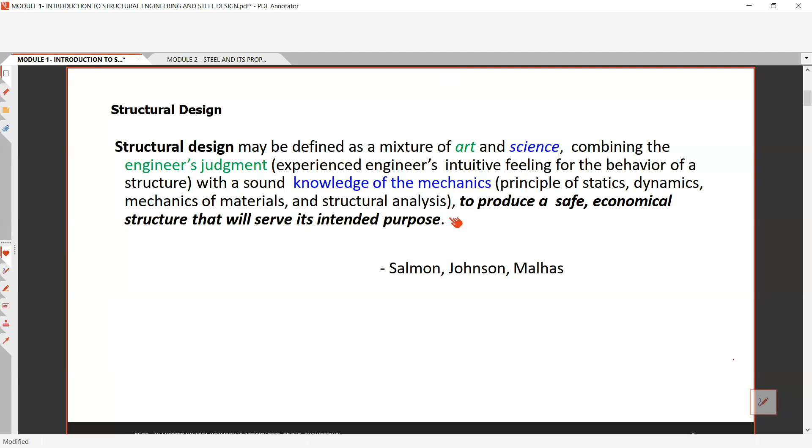So structural design may be defined as a mixture of art and science, combining the engineering judgment, experienced engineers' intuitive feeling for the behavior of structures, with the sound knowledge of mechanics. So ginagamitan siya ng principles of statics, dynamics, mechanics of materials, structural analysis, and many more to produce a safe, economical structure that will serve its intended purpose. Okay, so that is the purpose of structural design.

Okay, so what is structural analysis naman? So marami kasing nagtatanong what is design and analysis. Structural analysis is the process of determining the response of a structure due to external actions. So after you've done your structural analysis, you will do structural design in order to create a solution that is safe, economical, and stands its purpose. Okay? So yan yung structural analysis and structural design.

So for structural analysis, we need to find the actions and the response. So first, syempre, kailangan hanapin natin yung action. Actions are the anticipated forces or loads during the lifetime of the structure. Hanapin natin yung gravity loads, earthquake loads, wind loads, that is the actions. Ito yung mga anticipated forces or loads na pwede nating makonsider during the lifetime of the structure.

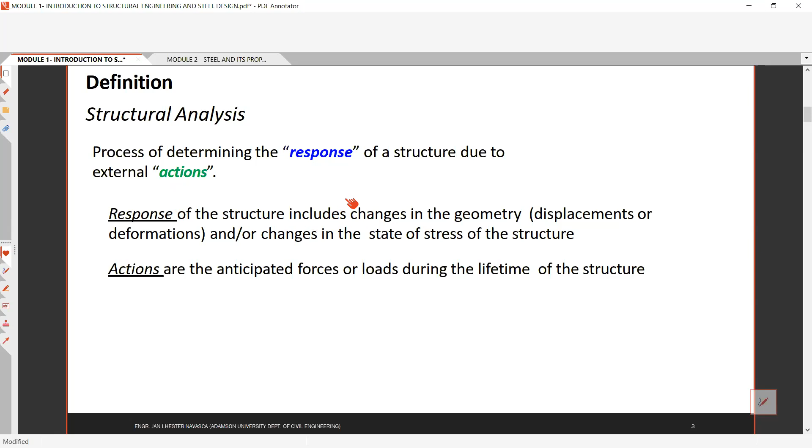Okay? So the principles of design. There are many principles of design. The design criteria are established to evaluate whether or not our design is optimum and has been achieved. The typical criteria are as follows: minimum cost, minimum weight, minimum construction time, minimum labor, minimum cost of manufacture of owner's product, and maximum efficiency of operation to owner.

Okay, so the minimum cost and the minimum weight is based na rin dun sa economical ba yung section mo. So we will check if yung section na design natin is economical, and ito na ba yung pinaka-optimum design, or ito na ba yung pinaka-magaan na section na pasok pa rin sa capacity and safety of the structure. The cost and the weight are directly related. Syempre mas mabigat, mas mahal.

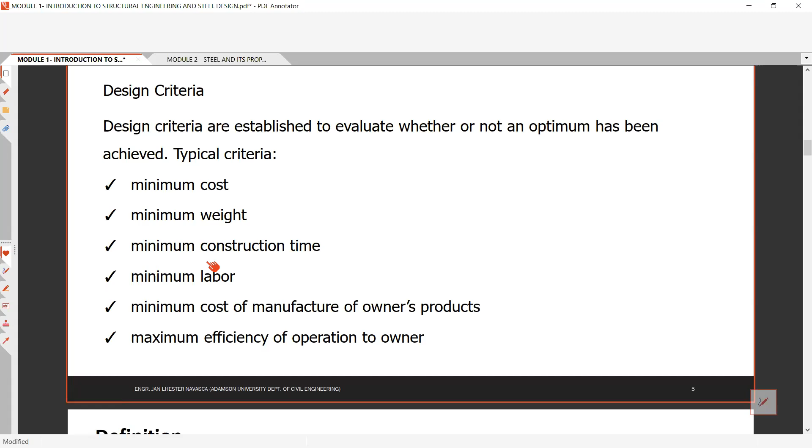Okay, next is the minimum labor. So directly related lang din tong construction time and labor. Okay, cost of manufacture of owner's product is the same, and the efficiency of the operations to owners.

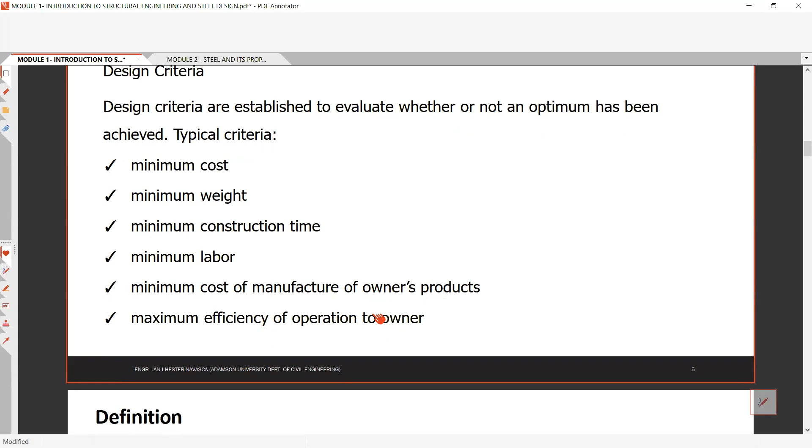Syempre, ang gusto kasi ng kalimitan lahat ng owner ay gusto matapos agad-agad yung project. So syempre, you need to catch up yung kagustuhan ng owner na yan. So that is the design criteria, or a simple design criteria in the principles of the design.

Okay, so what are the design procedure? It is composed of two parts. The first part we have the functional design, and the second part is the structural framework design. So ano yung functional design? The functional design ensures that intended results are achieved, such as the adequate working areas and clearance. Okay? So we need to consider syempre yung mga

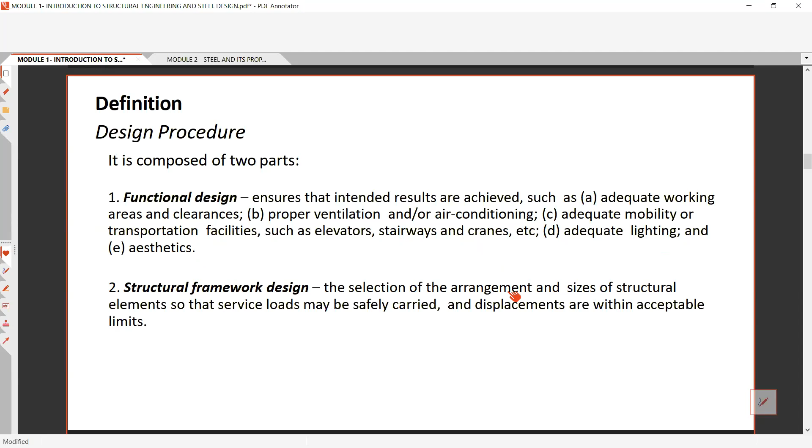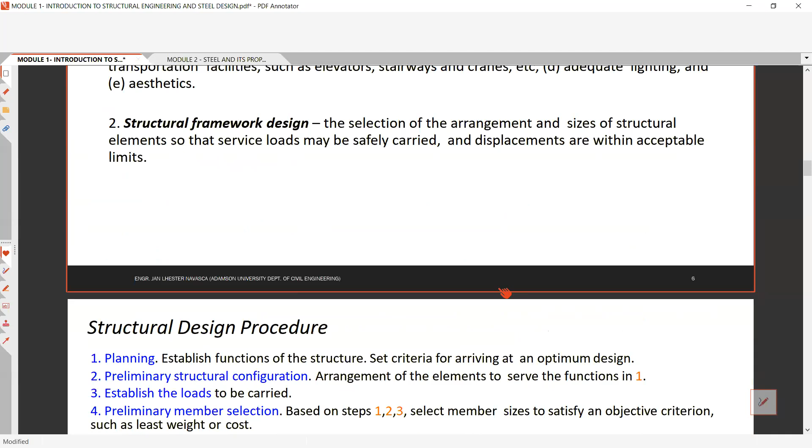So next one is the structural framework design. At this part, yung selection and arrangement of sizes of structural elements so that the service loads may be safely carried and displacements are within the acceptable limits. Okay, so ito yung ating design procedure. So we have structural design procedure. Under the structural framework design, meron pa tayong iba't ibang procedure na kino-consider. So ito yung mga typical setup.

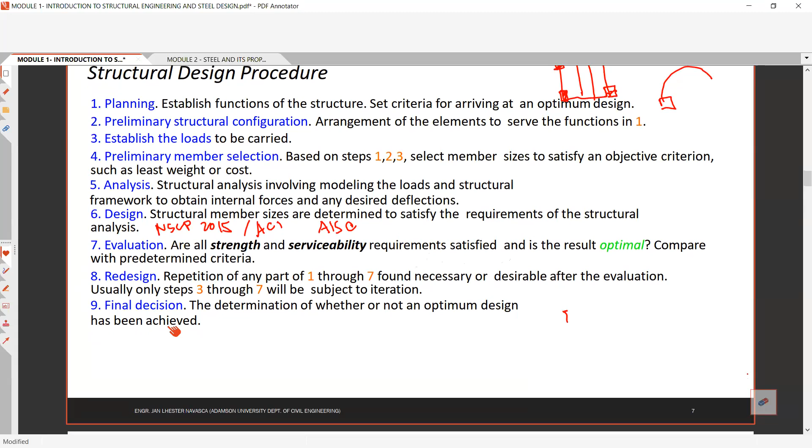Or kunwari yung top floor, may lalagyan ng helicopter pad, may pwedeng mag-landing na helicopter. So you need to reestablish the loadings and gravity loads at that area. Maybe kakapalan mo yung thickness ng slab, magbabago na naman yung stiffness matrix or the mass matrix of the whole structure. So magre-redesign ka ulit. And lastly, hopefully matapos na yung design mo within a specific time, is the final decision: determination of whether or not your design has been achieved.

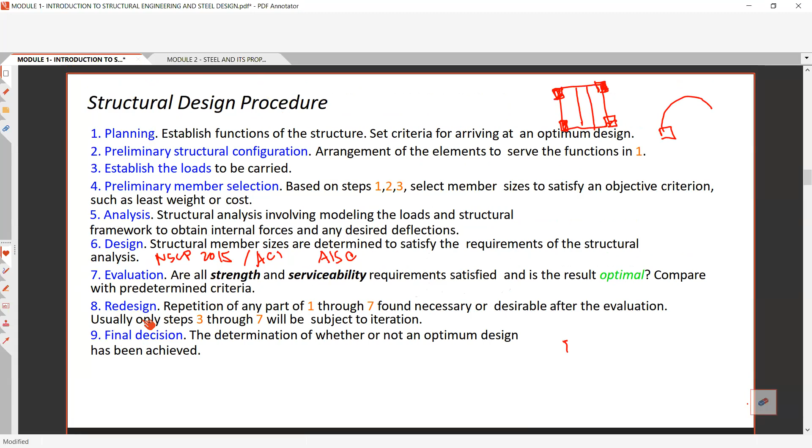Please note that all of this structural design procedure is very tedious. After ng final decision mo, let's say pasok na, ito na yung design mo, magkakaroon ka pa ng construction drawings and detailing.

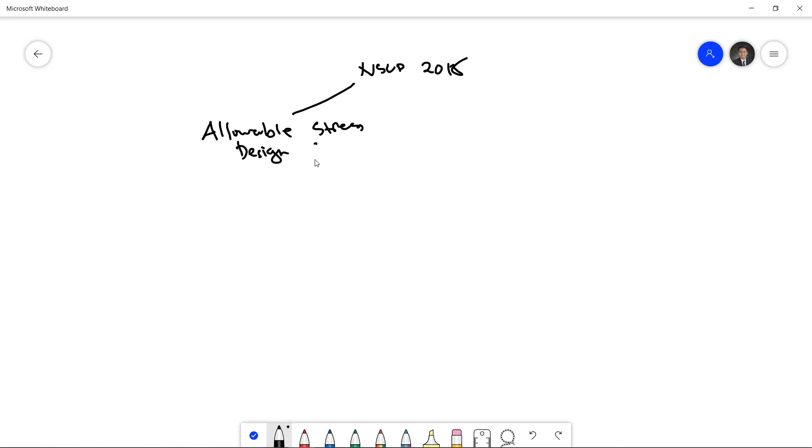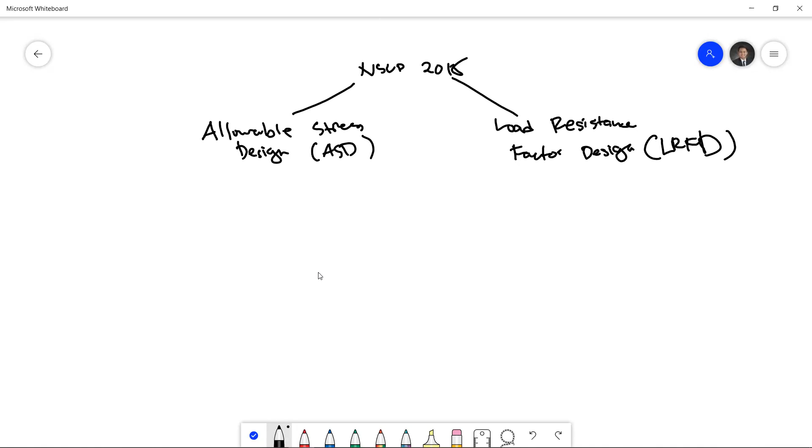Yes po, sir. Okay. So, let's say pag-usapan natin yung code na NSCP 2015. Let's say NSCP 2015 yung gagamitin natin structural code. Okay, so under the NSCP 2015, we have the allowable stress design, the ASD, and we have the load resistance factor design, or the LRFD. So under the allowable stress design, ang pinag-uusapan lang dito is working stress versus the nominal capacity.

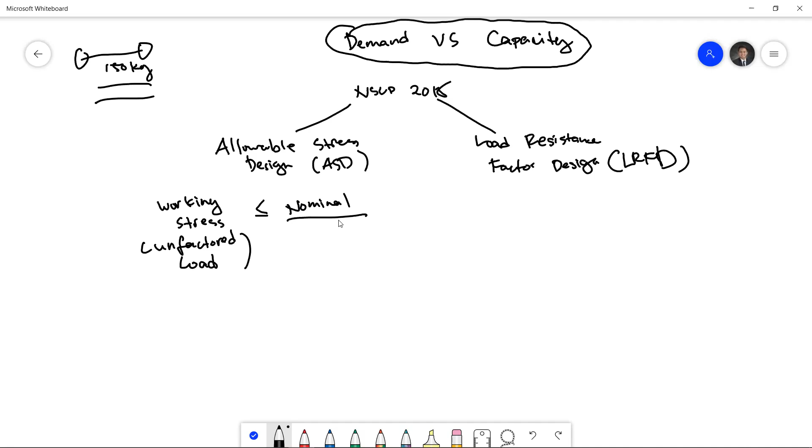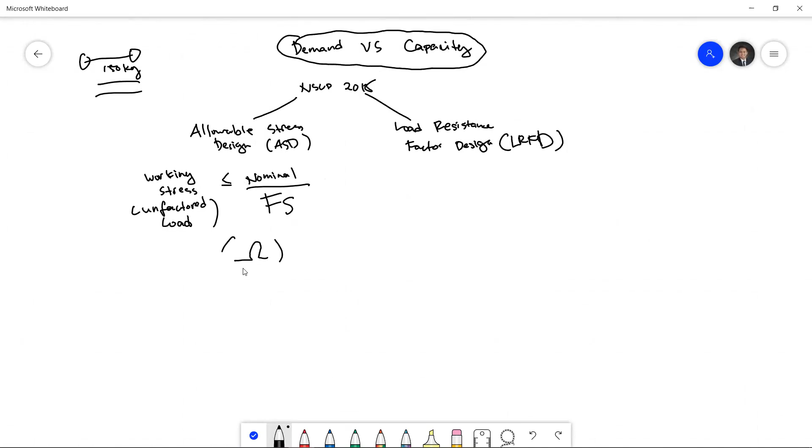So ganun din sa allowable stress design. Yung nominal capacity mo, dinidivide mo yan ng factor of safety. So that factor of safety ay denoted as omega, and that factor of safety is always greater than 1.0.

Syempre, hindi mo pwedeng ipabuhat kay Heidelin Diaz yung 150 kilograms, kasi nga hindi naman perfect yung scenario. Paano kung nauna yung kaliwang kamay versus kanang kamay, so unbalanced na agad, or nagkamali yung breathing niya. So hindi mo siya pwedeng ipabuhat sa kanya. So that is the working stress design.

However, dito sa load resistance factor design, ang kino-compare dito is yung ultimate load versus the resistance. Ganun din yung concept - ito yung demand, ito yung capacity.

Okay, same kwento, same story. Let's say Heidelin Diaz, 150 kilograms din. So sa load resistance factor design or LRFD, that is ultimate load, ibig sabihin this one is factored. Ganito ang style naman sa LRFD - ang ginagawa dito, pina-factor yung load. Yung load yung pinapalaki.

So if you recall, meron tayong iba't ibang load combination. Let's say U1, ito yung 1.4 dead load. If you recall, U2 is equals to 1.2 dead load plus 1.6 live load. Okay, so ganoon ang ginagawa.

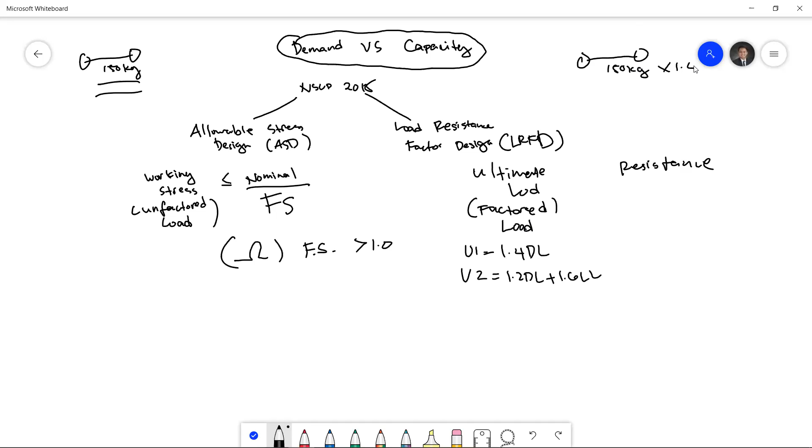hold the 170 kilogram na the weight of the barbell na 170 kilogram. Okay, that is the ultimate load, sir. And ultimate load shall be less than or equal to the resistance. So syempre dapat yung demand is less than or equal to sa capacity.

Okay, however, dito sa resistance, minumultiply siya ng factor phi. Ibig sabihin, yung load, kaya nga tinawag siya na load resistance factor design kasi yung load ay may factor and yung resistance may factor. Ito yung load, ito yung resistance, naglagay ng factor. So yung resistance, ang tawag, that is also a capacity, resistance lang yung tawag nila.

Okay, that factor phi, ang tawag dyan is the resistance factor. Yung resistance, that is the nominal then. Ito yung comparing to the allowable design, that is also the nominal. And that factor phi is less than 1.0 naman. So comparing to the ASD, yung factor of safety niya is greater than 1.0 since dinidivide. Kapag LRFD naman, yung factor phi is less than 1.0 dahil minumultiply siya. Okay, yan yung sa LRFD.

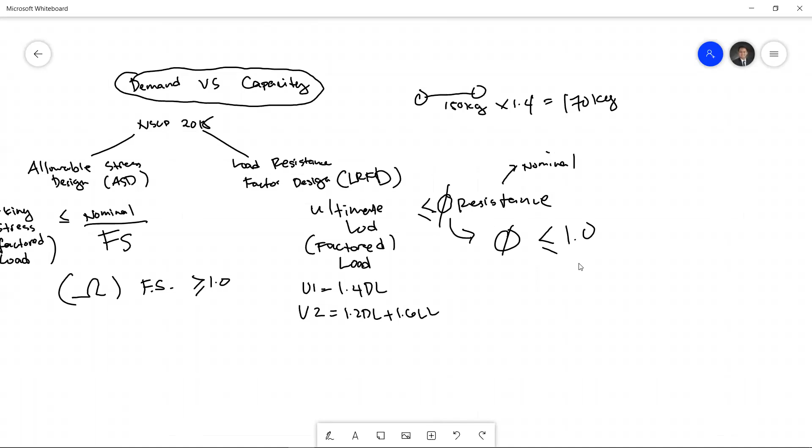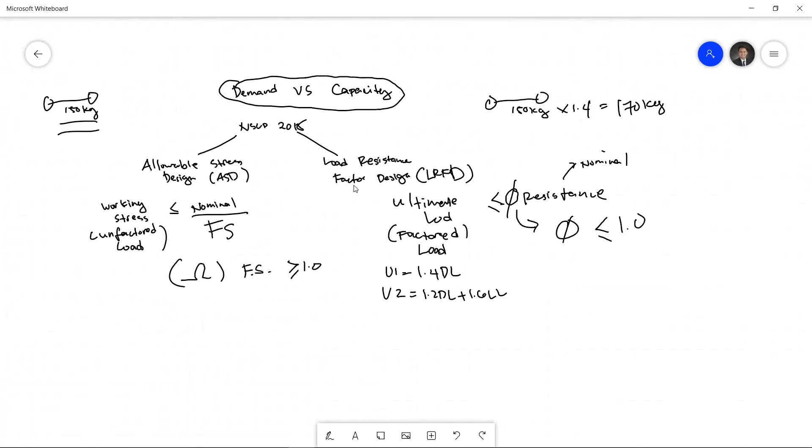So ASD versus LRFD. Sa ASD, unfactored versus nominal over factor of safety, whereas sa load resistance, dalawa yung may factor - load ay may factor and resistance is may factor. Okay, and also take note that the allowable stress design is under elastic region. Ibig sabihin, all formulas under the allowable stress design ay kinukonsider lang yung elastic region of the material, and this one is yung plastic region.

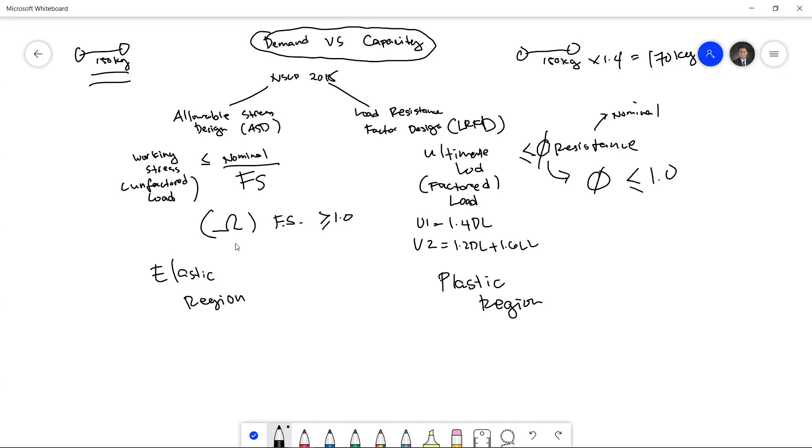So if you recall, elastic region, ito yung region where your material is elastic, so ibig sabihin babalik pa siya doon sa original. Kapag na-deform siya, babalik pa siya doon sa original form niya, whereas yung plastic is nagkakaroon na siya ng plastic hinging and medyo lagpas na siya sa elastic region. Okay, that is the load resistance and the ASD.

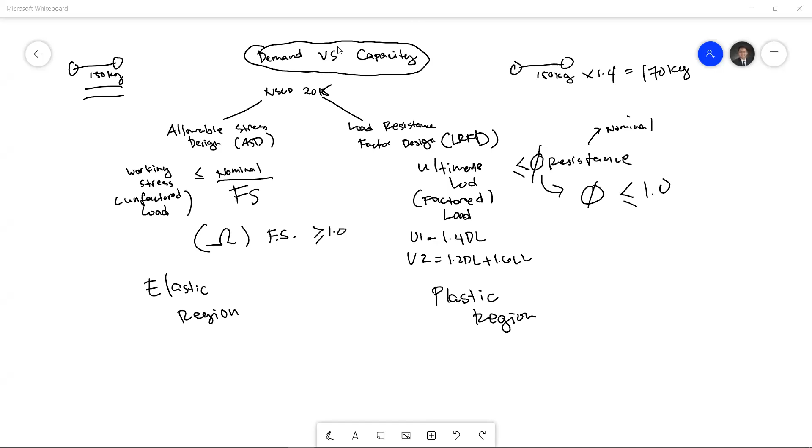Okay, so balik tayo dito sa philosophies of the design. So the basic principle again, that is capacity compared to the demand. So resistance compared to the load, R is compared to Q. That is always the basic design principle. Take note of this one para hindi kayo malito. Always find the capacity, find the demand, compare.

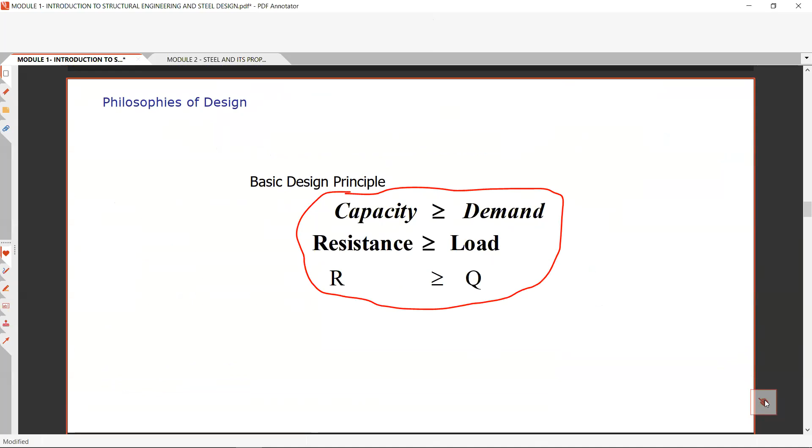Okay, so what are the structural loadings? I think you already know this. We have the dead load, the live load, the wind load, earthquake loads, snow loads, hydrostatic loads, and other special loads.

Under dead load, we have the self-weight and the superimposed dead loads. The dead load is a static force that is relatively constant for an extended time. Self-weight is the dead weight of the structure, including the full weight of the beams, columns, staircase, floors, walls, etc.

The superimposed dead load is the permanent appliances and any fixed decorations. For example, partition walls, fixtures, ceiling framing - that is under superimposed dead load.

Next one is the live load. The live load is usually a variable or moving load. Live load refers to the occupational forces from the occupancy intended use. So the live load differs for residential use, office use, amenities, pool, gardens, or theater. That is a live load.

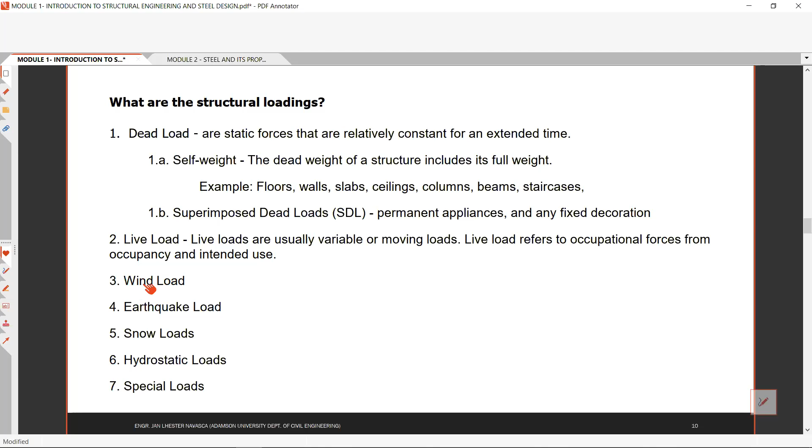Next, we have the earthquake load. As you all know, the Philippines is under the Pacific Ring of Fire, so our earthquakes are very frequent. So we consider earthquake and wind load in the Philippines. However, snow loads - since there's no snow in the Philippines, we don't consider that. But in other countries, they do consider snow loads.

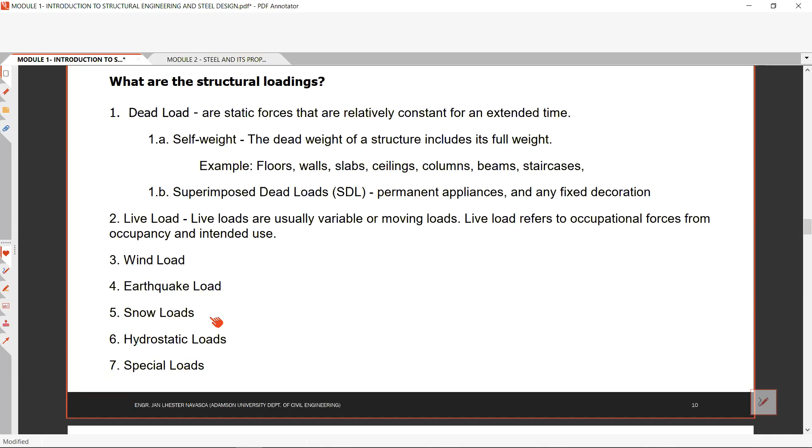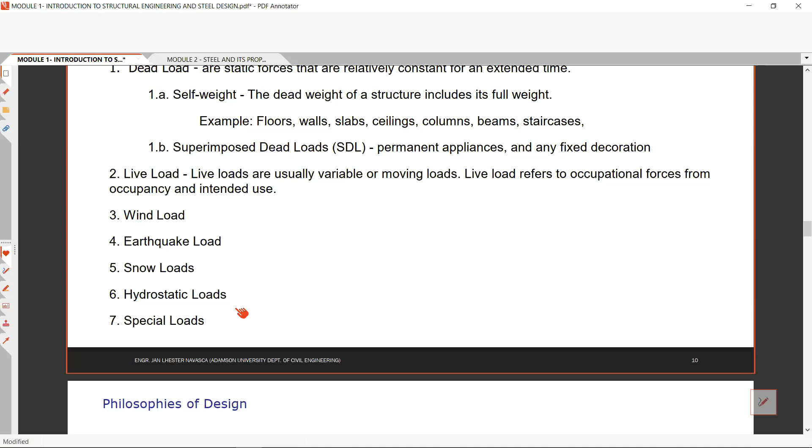And lastly, we have the special loads. This includes vibration, impact loads, induced vibration, blast loading, and similar things - those are special loads. Then we have the limit states.

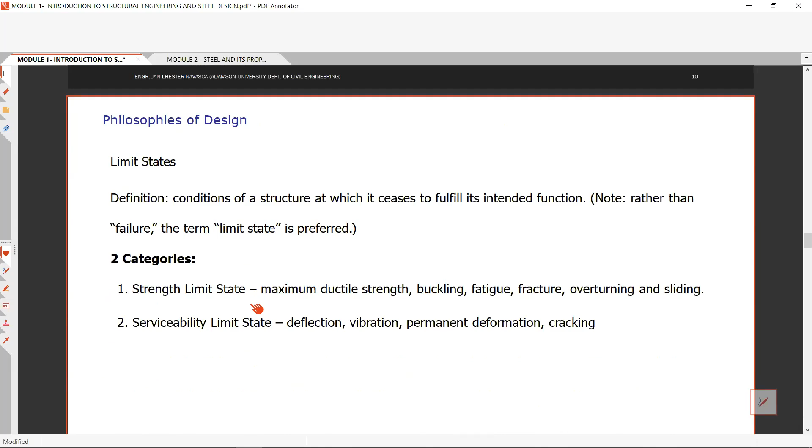We have two categories or limit states considered in design - I mentioned this earlier - strength and serviceability. For strength, we consider maximum ductile strength, buckling, fatigue, failure, fracture, overturning, sliding - that is strength based purely on capacity.

And lastly, we have the serviceability limit state. What is the serviceability limit state? This includes deflection, vibration, permanent deformation, and cracking. This is serviceability - it's seen directly by the homeowner or client under service conditions. So we also need to consider the serviceability limit state.

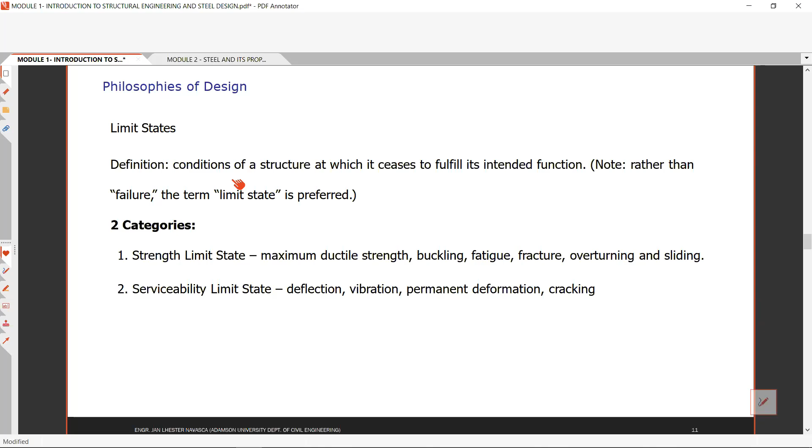Okay. You will use the term limit state. Now, the codes and design standards in the Philippines: we have the NSCP 2010, NSCP 2015, and the Steel Construction Manual or the AISC. These are the steel design codes in the Philippines.

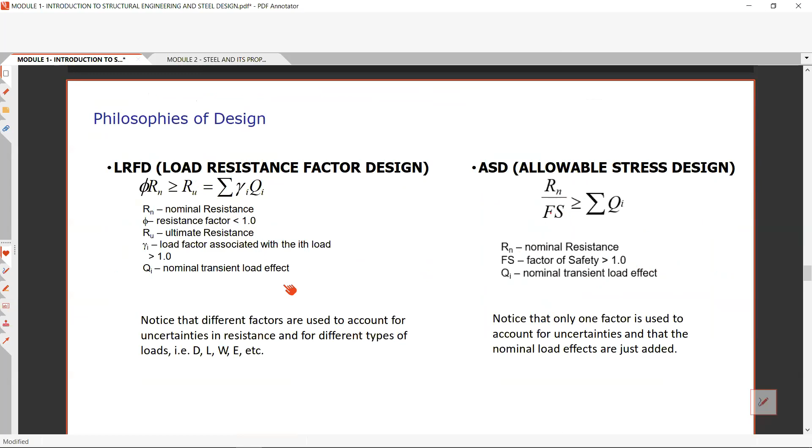Okay, so there are also uncertainties in the design. Uncertainty exists in everything we design. We compensate for the uncertainties in our design. The way in which we compensate is different between LRFD and ASD. So we have the nominal capacity resistance factor.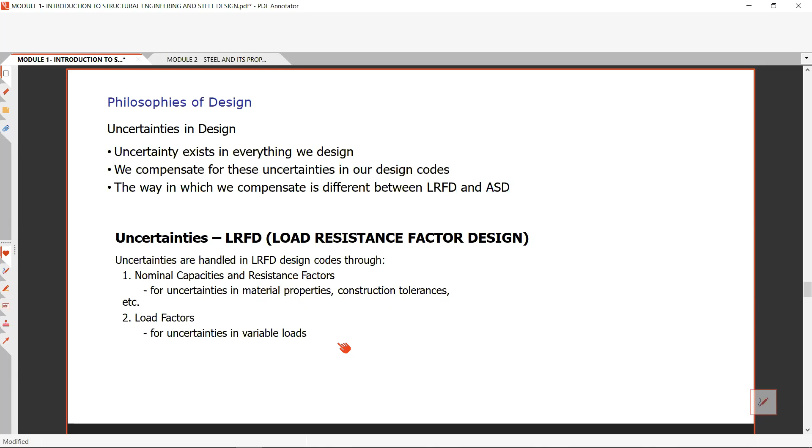Uncertainties here are material properties and construction tolerances. For the load factor, the uncertainties are the variable loads. However, for the uncertainty in ASD or allowable stress design, it's the factor of safety, because they are using a single variable to handle all uncertainties in both load and capacity. So that factor of safety alone handles all the different uncertainties - it's somewhat lacking.

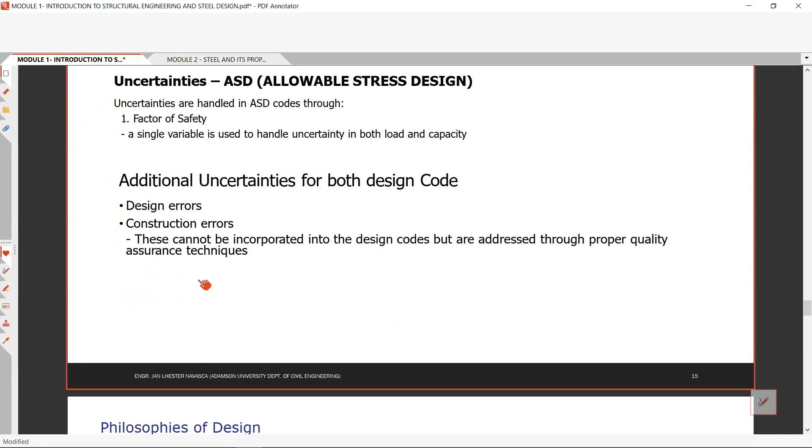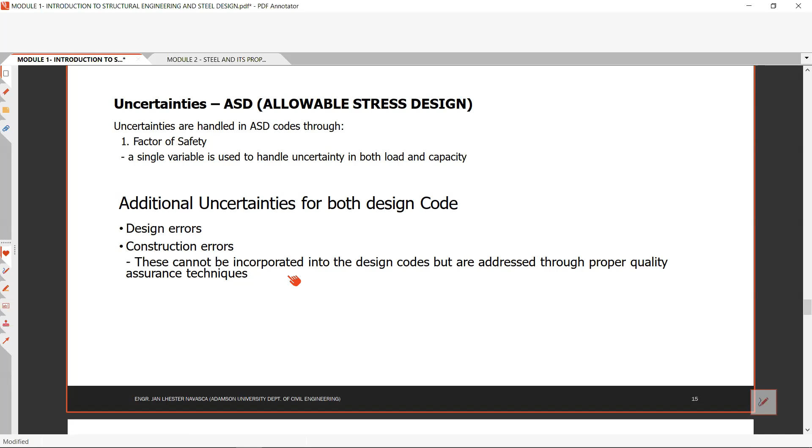Okay, additional uncertainties for both LRFD and ASD design codes are design error and construction error. Take note that construction error cannot be incorporated in the design codes but are addressed through proper quality assurance technique and proper detailing. That's why we have quality control and quality assurance on site - QA/QC ensures proper detailing and proper quality of our structure on site.

Okay, now the different load combinations of LRFD. As I mentioned earlier, this one is 1.4 dead load, and 1.2 dead load plus 1.6 live load. These are all the different LRFD load combinations. When there's LR, that is roof live load plus F1L or 0.8W. F1 is 1.0 for floors greater than 4.8, and 0.5 for less than 4.8 kPa. 4.8 kPa in English is 100 pounds per square foot.

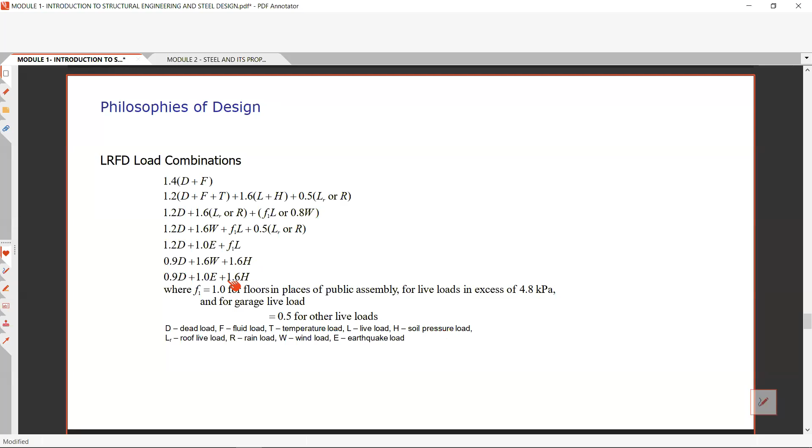Next is this one: 1.2 dead load plus 1.6 wind plus F1L plus 0.5 roof live load. For earthquake, the letter E is earthquake load, W is wind load, and H is the soil pressure load. If there's no soil pressure load, just make it 0. That's the exact load combinations now.

Then for the ASD load combinations, we have the following: dead load alone - if there's no F, that means no fluid load, so it's just dead load. You can convert it to just dead load, or dead load where H, F, T are absent, so you can set them to 0, 0, 0. That is dead load plus live load. This one is dead load plus roof live load.

This one is dead load plus 0.75 live load or temperature load. This one is when there's wind or earthquake. This one has earthquake loads. So if you notice, when there's wind and earthquake load, for gravity loads, they're just added directly - unfactored load. However, when there's earthquake and wind, there's only a factor of around 1.4 applied. Other cases have none.

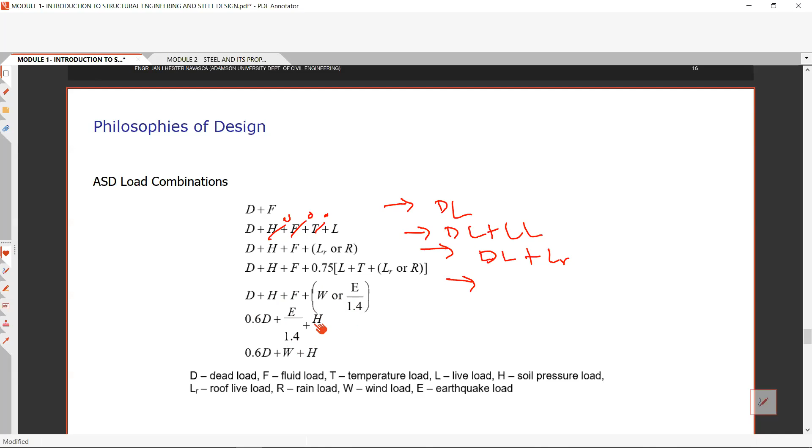That is the ASD load combinations. So compared to ASD, there are really a lot of factors applied to the load - that's why it's called load and resistance factor design.

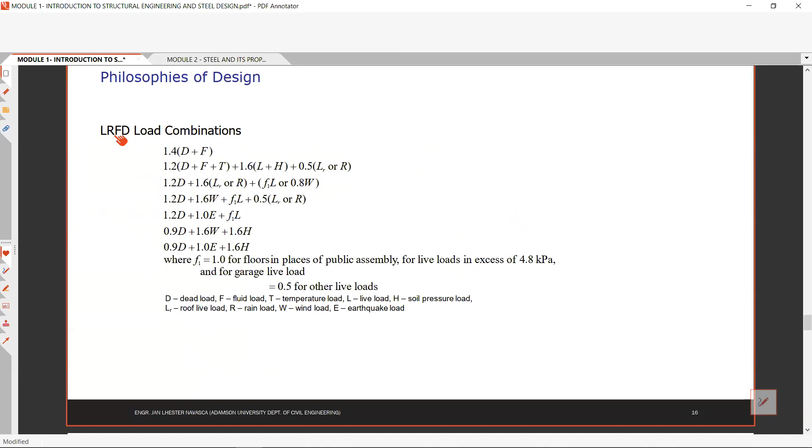Okay, then we have the different phi resistance factors in LRFD. Take note that in tension members, we have 0.9 and 0.75. For compression, we have 0.9. For beams, we have 0.9. For fasteners, we have 0.75.

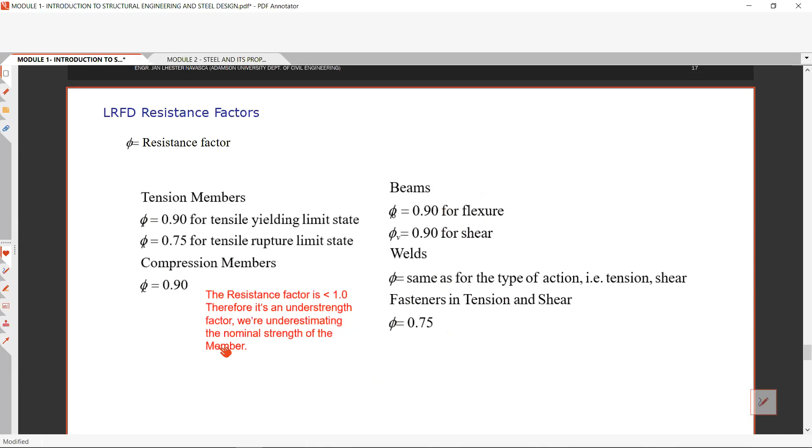So the resistance factor, kung mapapansin nyo, is always less than 1.0. Therefore, it is an understrength factor and we are underestimating the nominal strength of the member. Okay? So more on this kapag nandun na tayo sa mga topic ng tension members, compression members, beams, and welds. So for now, overview lang to ng mga resistance factor.

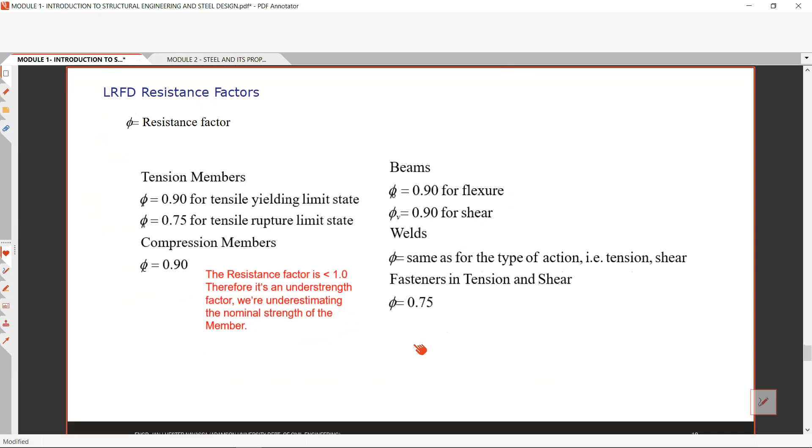Okay? Then for the factors of ASD, the traditional value is 1.67. So saan nakuha ba yung 1.67? Ito kasi yung inadapt ni ASD, whereas the exact value is 1.65. So saan ba yung derivation ng 1.67? The reference is Salmon and Malhas, 2009, where the resistance minus the change in resistance is equal to the demand load plus the change in demand load.

So we will rearrange that and factor out Rn: Rn times (1 minus delta Rn over Rn) is equal to Q multiplied by (1 plus delta Q over Q), where delta Q over Q is the overload and delta Rn over Rn is the understrength. Then the factor of safety, Rn over Q, is given by (1 plus delta Q over Q) over (1 minus delta Rn over Rn).

Assuming that delta Q over Q is 40% and delta Rn over Rn is 15%, without identifying the factors contributing to either value, our factor of safety is 1.4 over 1 minus 0.15, which gives 1.65. Take note that the traditional AISC value of the factor of safety is 1.67, and it is used in ASD. Okay.

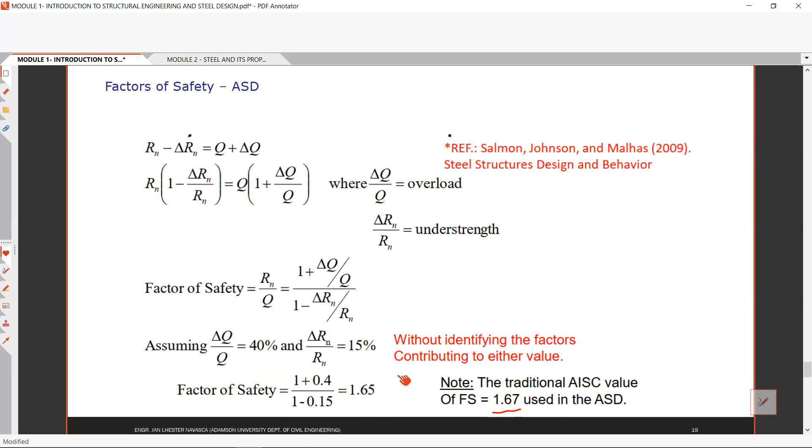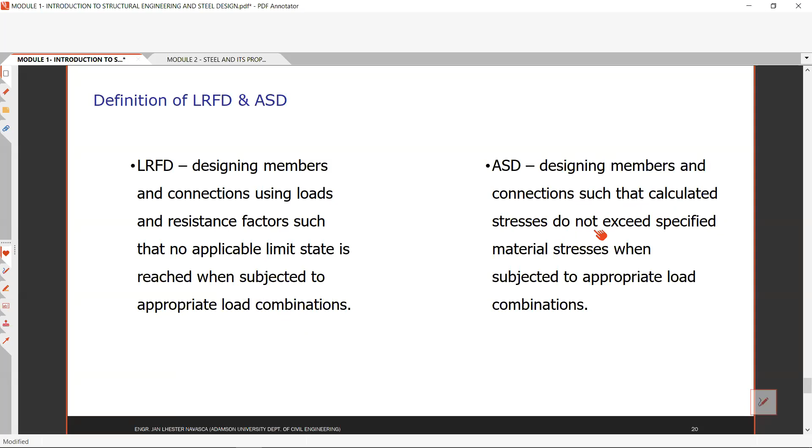So overall, LRFD is designing members and connections using load and resistance factor design such that no applicable limit state is reached when subjected to appropriate load combinations. And ASD is the designing of members and connections such that the calculated stresses do not exceed the specified material stress when subjected to appropriate load combinations.

Okay, so the question is why should LRFD be used according to Professor Beedle? Ito yung main contributor ng AISC, ito yung pinakamaraming contribute sa AISC. So according to him, we should use LRFD. So ito yung list of why we need to use LRFD versus ASD.

Okay, so the adoption of LRFD is not mandatory but provides flexibility and options to the designer. Also, the rationality of LRFD has always been attractive and becomes the incentive permitting better and more economical use for some load combinations and structural configurations. So mas economical daw siya in some load combinations and structural configurations. Then using multiple load factor combinations should lead to economy. Since LRFD has maraming load combinations,

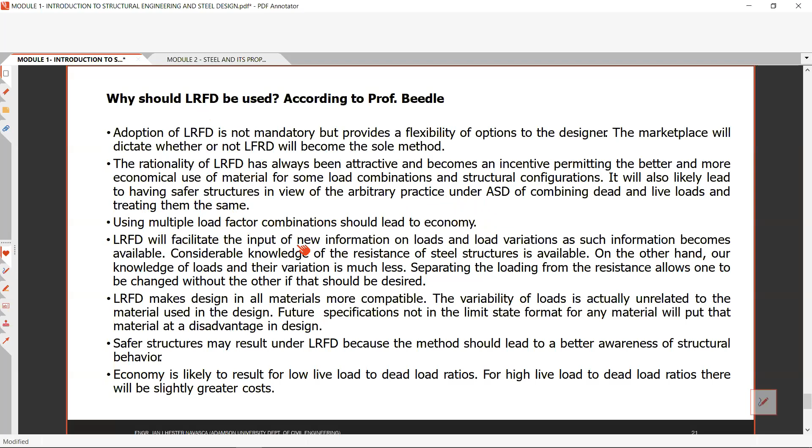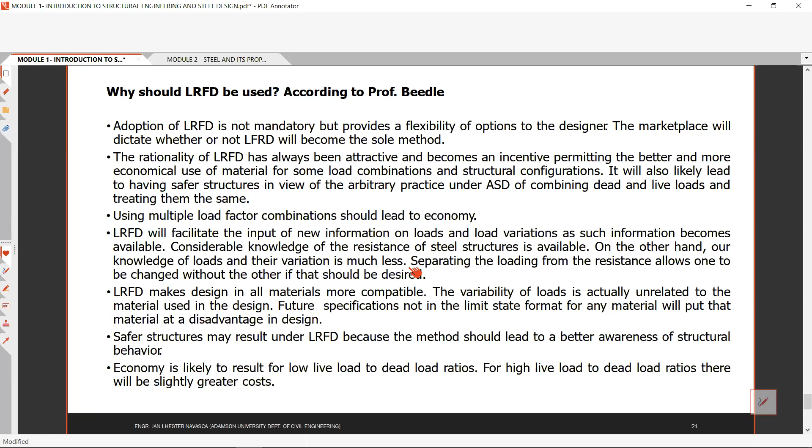that will lead us to economical design. LRFD will facilitate the input of new information on loads and load variations as information becomes available. And LRFD makes design in all materials more compatible. Safer structures may result under LRFD because the method should lead to a better awareness of structural behavior, and economy is likely to result for low live load to dead load ratios.

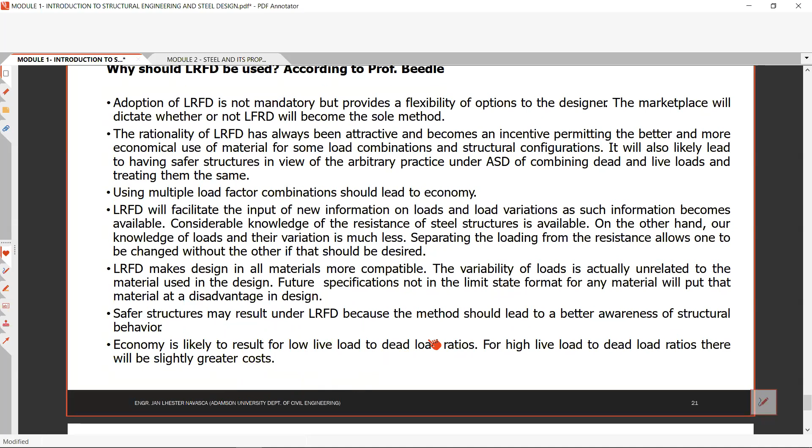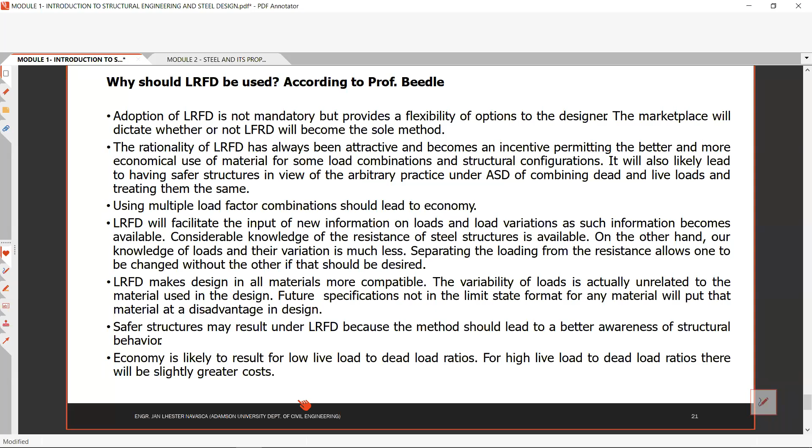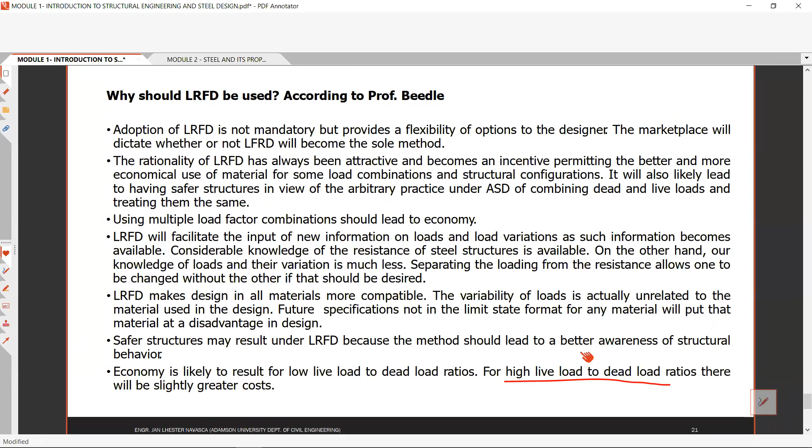Therefore, kalimitan mas mababa yung live load when compared to dead load kasi meron tayong self weight and superimposed dead load. Therefore, we should use LRFD, di ba? For high live load to dead load ratios, there will be slightly greater cost. So in the cases kapag mataas yung live load compared to dead load, maybe you consider ASD for that arrangement. Okay? So those are the cases where you should use LRFD.